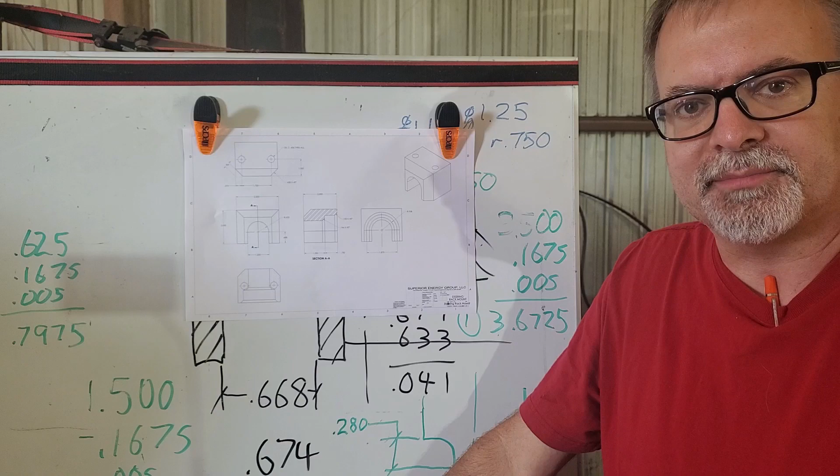We're rolling right into part 2 of making the hold down brackets for my son's power steering rack and pinion assembly in the Spitfire. So it's 2 rectangular chunks of steel. We roughed those out, hogged them out of a big block that I had. Now we get to put all the interesting features in it.

So basically, if you can tell from this view, we've got a scallop and then a clearance scallop behind it. And there's fairly good sized chamfers on the lead ends of both of those. And then around this small end, really big chamfers.

So I added a feature here. I took a measurement from the theoretical sharp corner down. I'll tell you about why I did that in a minute. 2 hold downs, 13/32nds, coming very close to the bore of this item here.

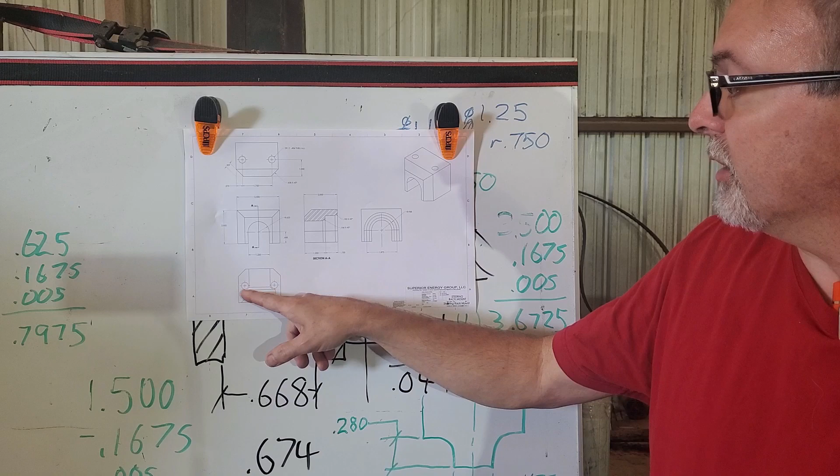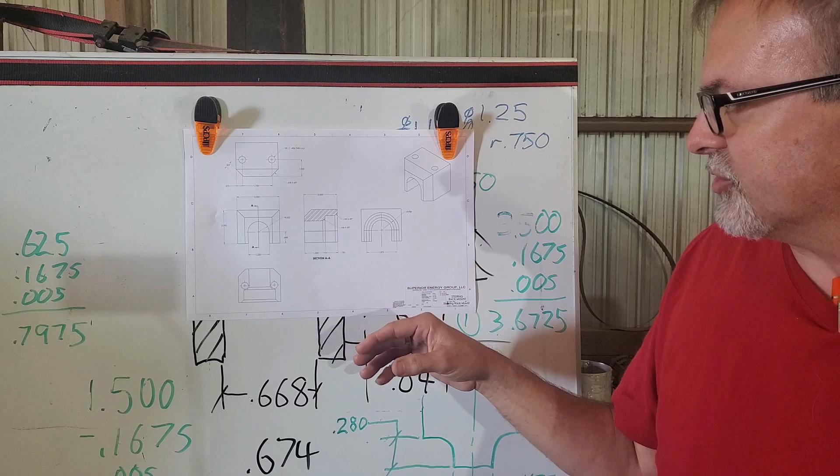Let's go over and take a look at the blocks and show you some opportunities. There's not many opportunities for combining operations or streamlining this process, making 2, but I've got a couple things we can do to make this a little quicker. So let's take a look at the blocks themselves.

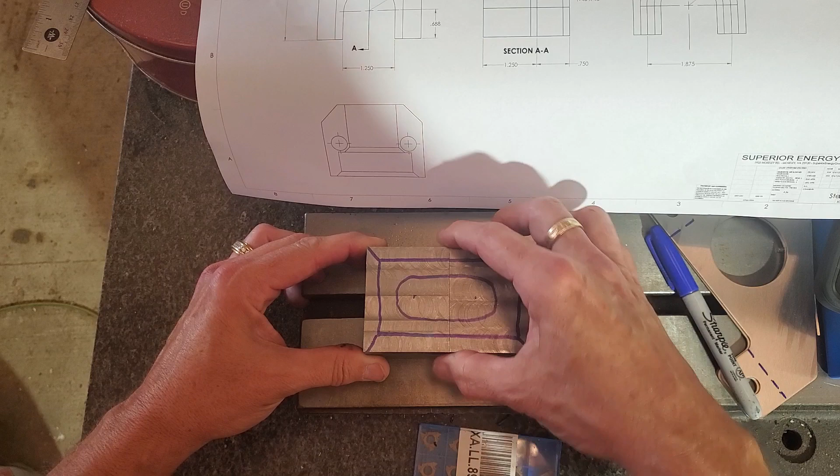I drew the features on the sides of this thing so I would kind of know what's going on. And my first thought for combining operations would be to put these together and machine it in one go instead of doing things individually.

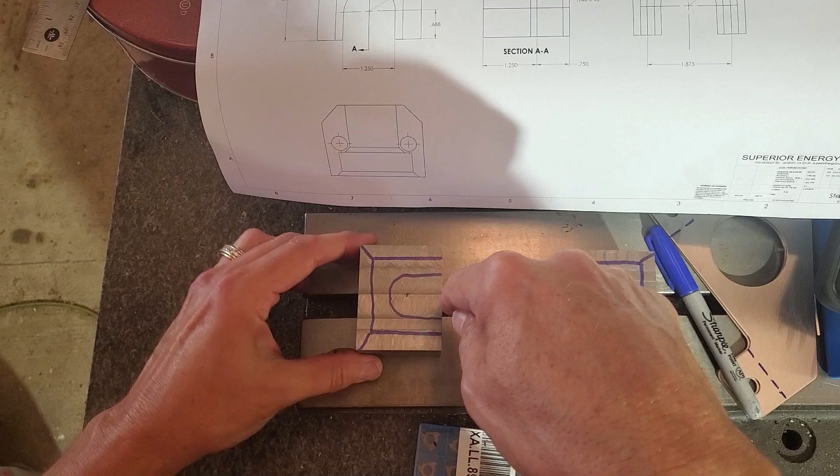Now, of course, if you didn't have a rotary head mill to do this feature, which has a scallop here, and then all of those internal chamfers, you would have to set up each block on a rotary table, and you would have to move your table into the cutter, swing it around, and come out, and do that for every pass until you were at your depth.

With the rotary head mill, I can clamp those together and I could offset my head and I can walk that profile and just keep increasing the depth until I'm at the depth I need. So initial thought, clamp them together.

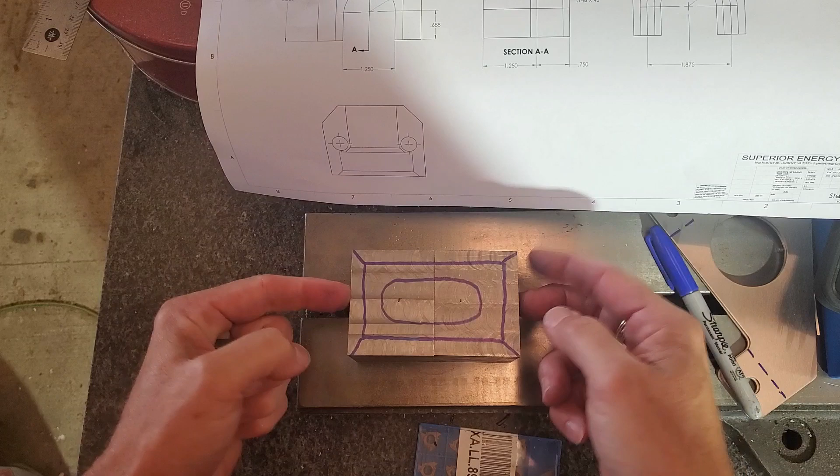Then I thought, well, you know what, if I separated them a known distance and I took a 1-inch gauge block and I separated these guys by, let's say, 1 inch, I would have an open cavity for chips to get evacuated and where I could plunge down and increase my depth.

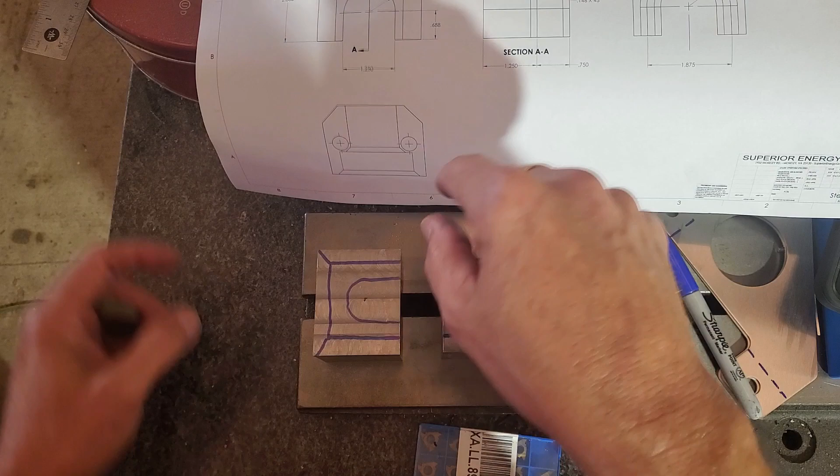This thing has to be 1.25 inches deep, minimum, on the small one. And so I will go just beyond that, and then when I flip the blocks over, same deal, have my 1-inch gauge block separating them.

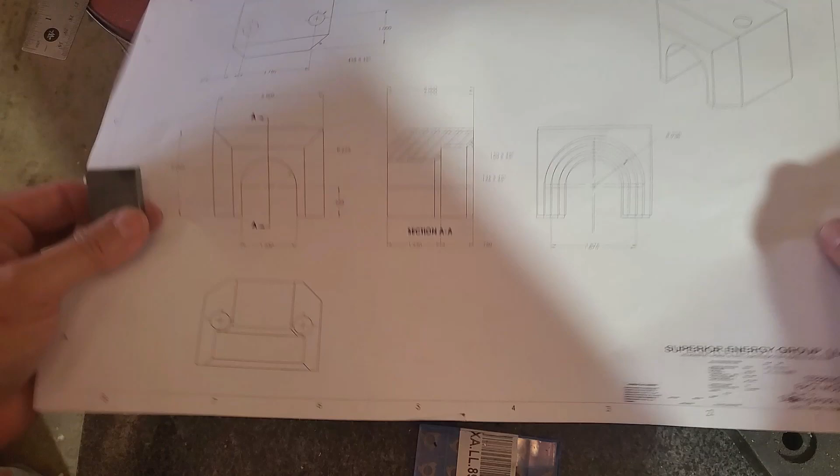I just have to plunge in and do the larger cut, which is - I don't have my - oh, there's a dimension, 1.875, and then a chamfer on each one. So I'll control my depth from that surface to that surface, which is 0.75 with the larger cut.

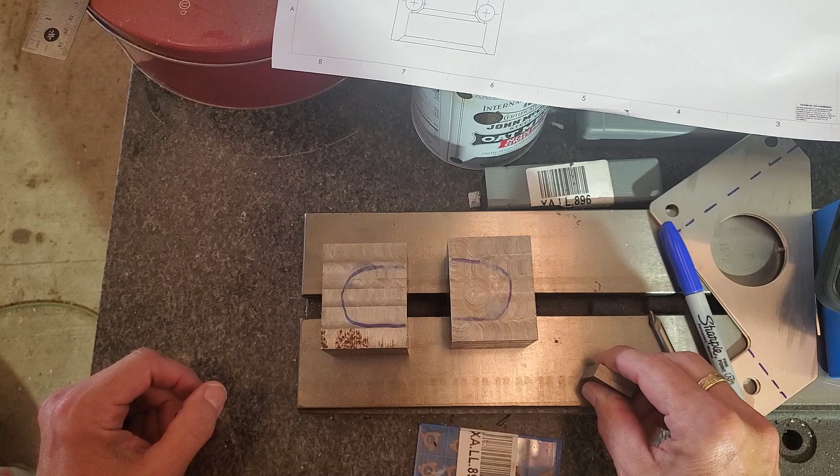So let's go get this thing set up in the mill, and let's crack on, as the brothers in the UK say it, with the rest of these operations.

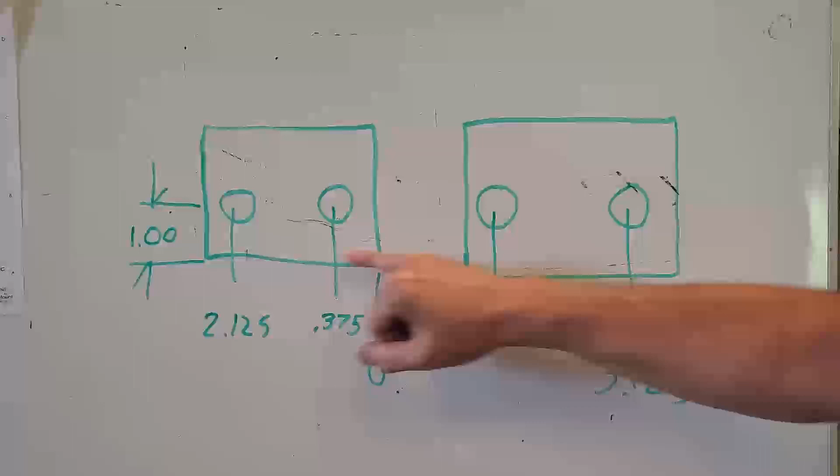My first setup, I'm actually going to clamp the blocks in the vise lengthwise. That way I can sit on my machined edge of the vise and the drill is free to poke down through between them. And I will zero up on the edge of one and the front face.

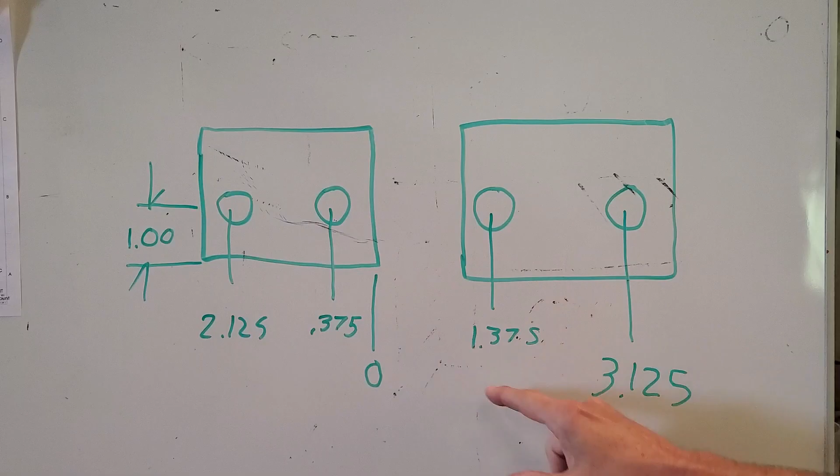So for my zero reference, my hole locations will be 0.375 and 2.125 in that direction. And in this direction, with the 1-inch gap, 1.375 and 3.125. These will be taken up to a 0.406.

Yeah, that just wants to start going in there.

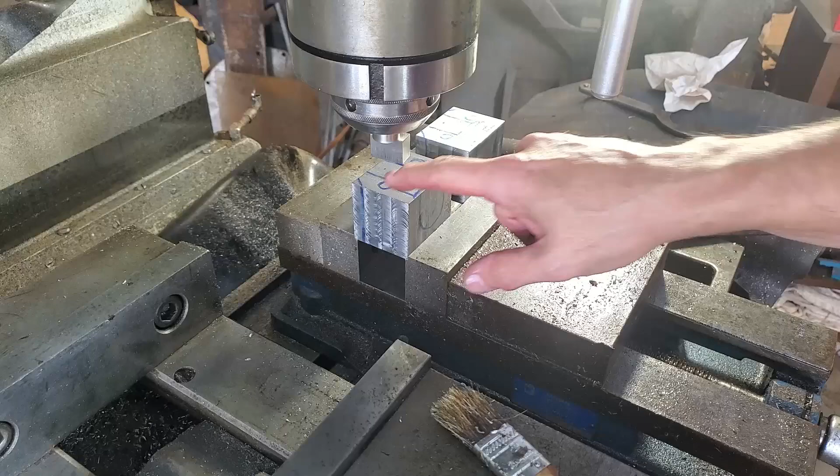Okay, so right now I've established that point as 0, 0. Minus 2.125, comma 1 is the location of the first hole. This is not the first time I've done this.

Try a little bit more aggressive feed. That was a thousandths feed. This is a 1.6 thousandths feed. Looks like we were better off where we were.

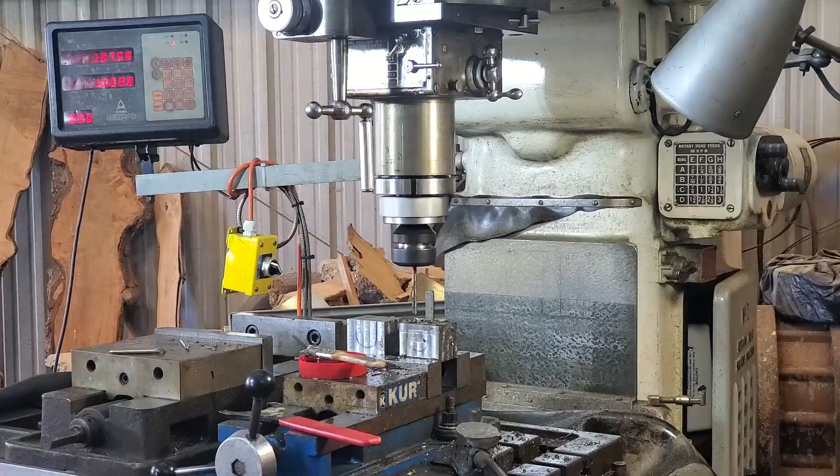Switching over to a China drill with a step shank and a hand grind. Actually drills pretty well. I can get it to focus.

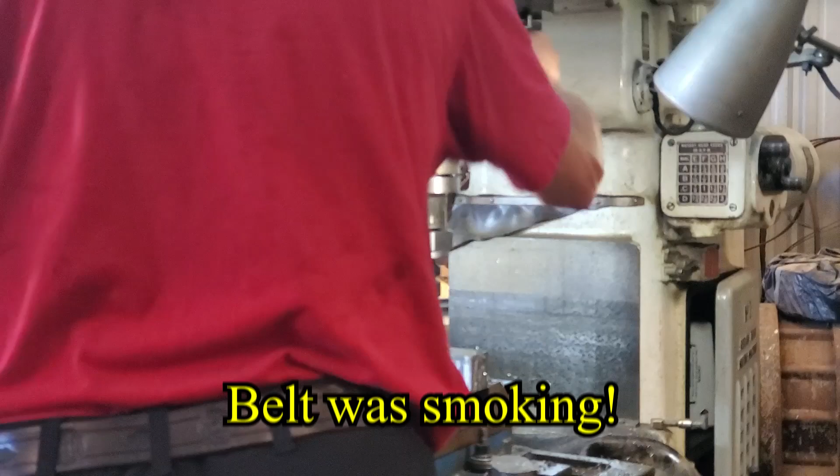According to FS Wizard, I'm supposed to be running about a 2.7 thousandths feed and 725 RPM. So I increased my feed to see how it performs. I let too many chips get packed in there.

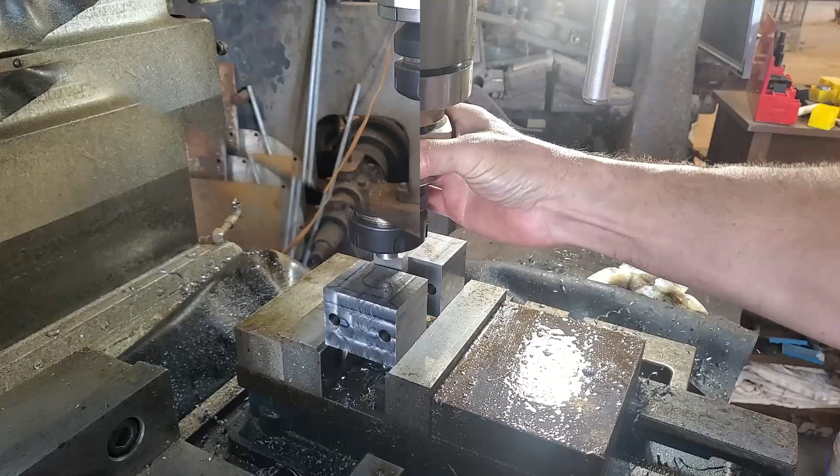Now going to re-zero my X. This time though, I'm going to make it halfway between the two blocks. So I'm going to take this dimension right here, snug against one block, and move a half inch and zero that.

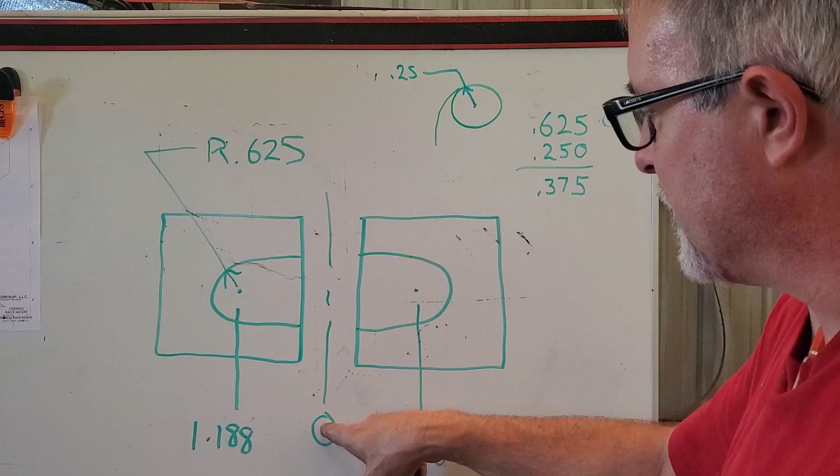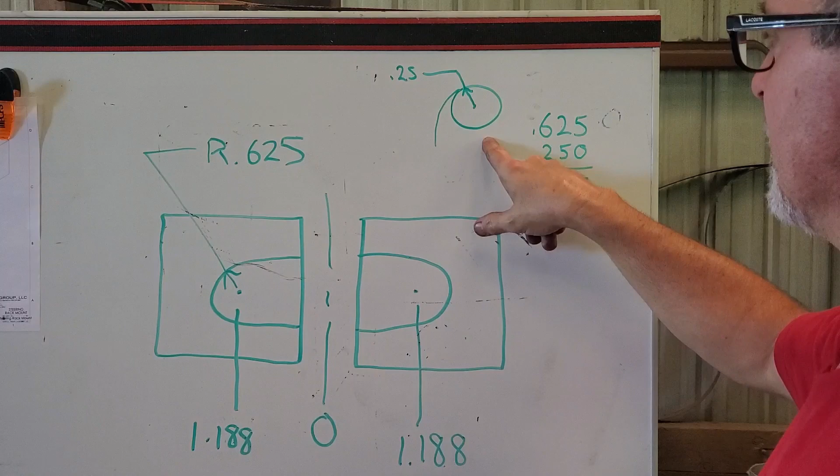Okay, I locked my Y table at 1.125. So here's how I'm set up for the next operation. I've got the 1 inch gap between here, I've got the machine at 0, I need to traverse 1.188 in either direction. At that point I swing the head around 180 and make a continuous loop. The cutter is a half inch, quarter inch radius, so to make a 5/8 radius scallop I need to subtract the radius of the cutter, and my head offset is 0.375.

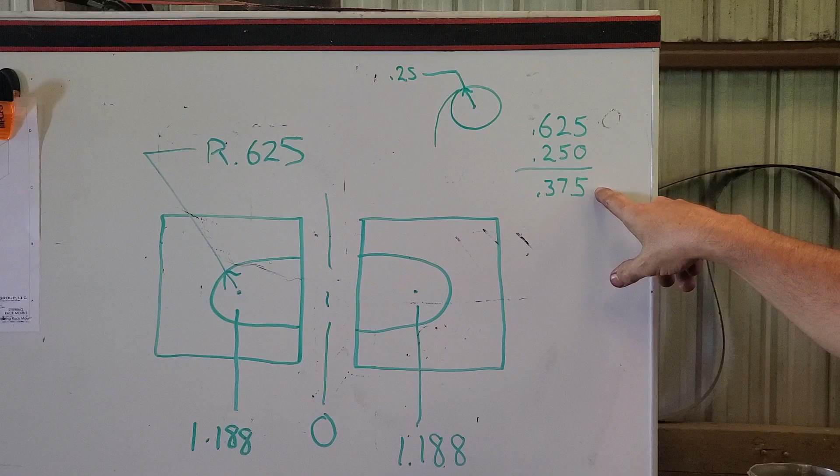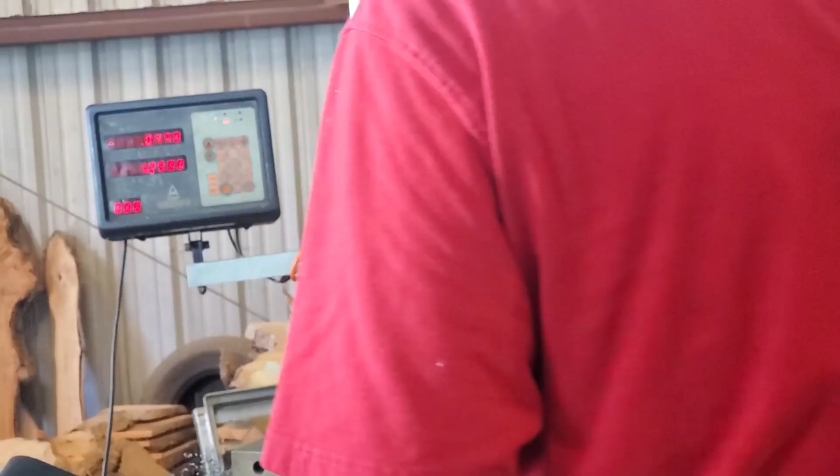I'm going to take a 30 thousandths depth of cut, just a witness cut to prove everything out. So offsetting my head, 100, 200, 300, 75. I want to lock that in. So there's my 180, and I'll be milling the front of this block first. There's my 30 thousandths. So I'm going to take it over to an X of 1.188.

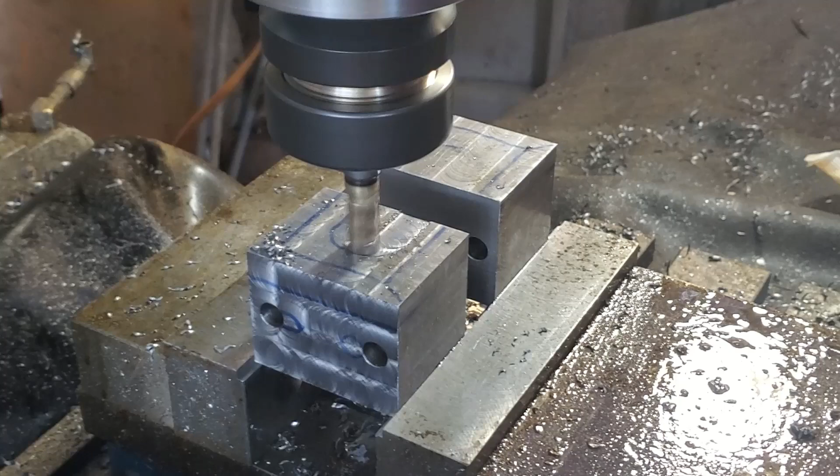Swing 180, I should be left with about an 1/8 inch wide rib standing up. And I just repeat that with a cut on the other side.

Now we just repeat that, except I think at this point I'm going to go with quarter inch depths of cut. Let's see how we can do.

Switched back over to my original collet because it just runs truer for heavy cuts. I think what I'll do is get the vacuum going, try to have 3 hands.

Let me show you what I've done here. I've set my kickouts, my table stops, so that the automatic travel will stop about a quarter inch shy of each end, and then I can hand dial up to the target on each side, but this way I won't accidentally overshoot it. So at each center I have to drop the cutter a quarter inch. I am currently a half inch deep. Next cut will be taking it down to 3/4.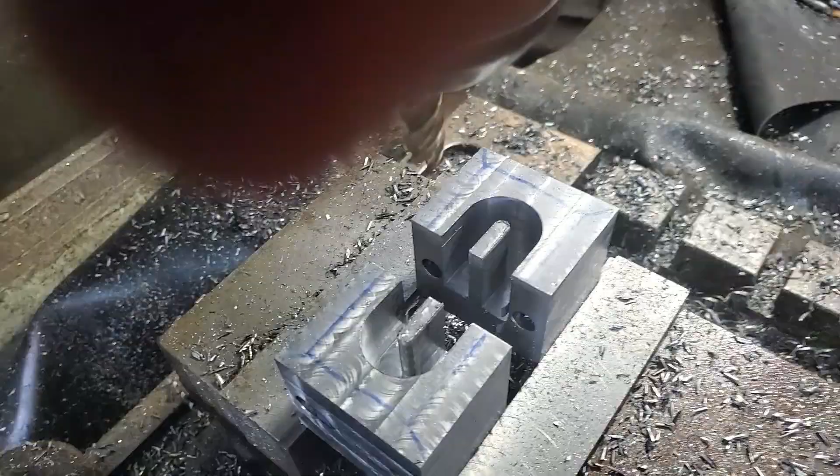That's really pretty cool. Do that on a manual machine, or without a rotary head mill.

I'm going to do one more operation before I break down this setup. It's not on the print, but I'm going to increase the offset of the head. Got my 45-degree chamfering tool. I'm going to put just a tiny little chamfer, 30 thousandths chamfer on that outer edge. I'll just bring the cutter down until it touches. And now I'll come down another 30.

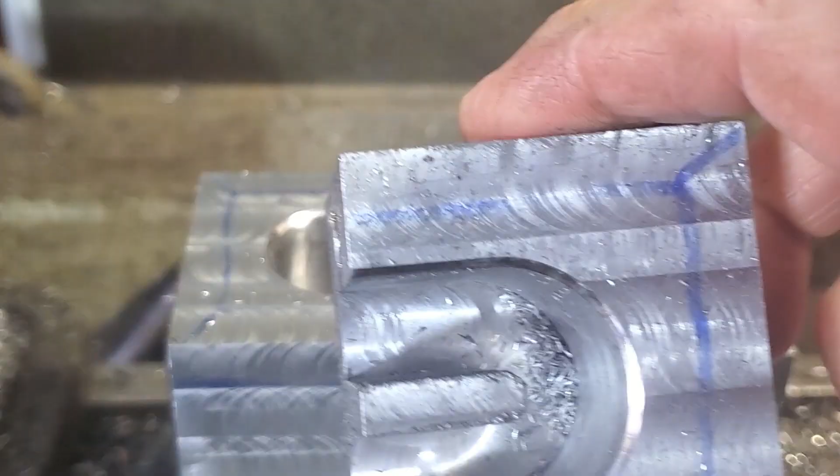Manual feeding. A deep cut.

Now, my theory is, got my DRO set for an X offset of a quarter inch, which means the half inch cutter, when I'm touching this block, puts that face in the same place it was when I was machining the other side. This establishes my spacing, and if I simply lock this down, I should be exactly on top of my other profile that I just made.

So this next profile has the same coordinates, it's just a different offset. Okay, so I have my offset, 0.6875 times 2 plus a half inch cutter diameter is 1.875. Same deal, walk it in, swing around, and a 30 thousandths deep test cut.

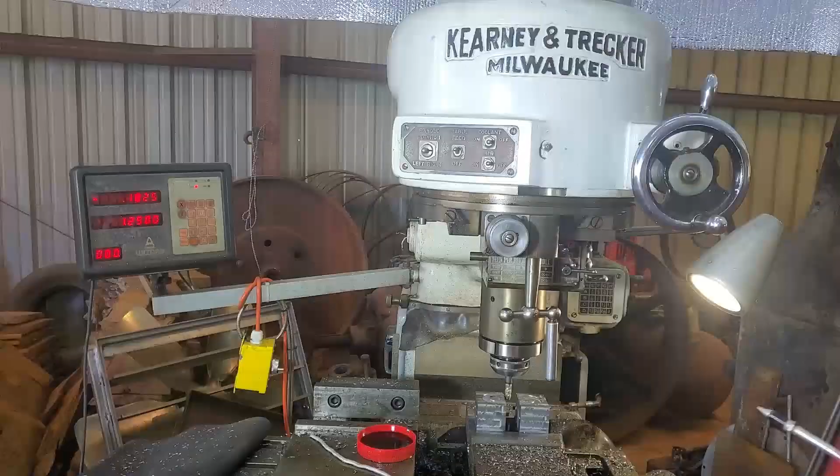There's my first pass, quarter inch deep. This side is exactly 3/4, so it's 3 passes. Final cut, an additional quarter inch, bringing the total to 750. This should break through to the other cut.

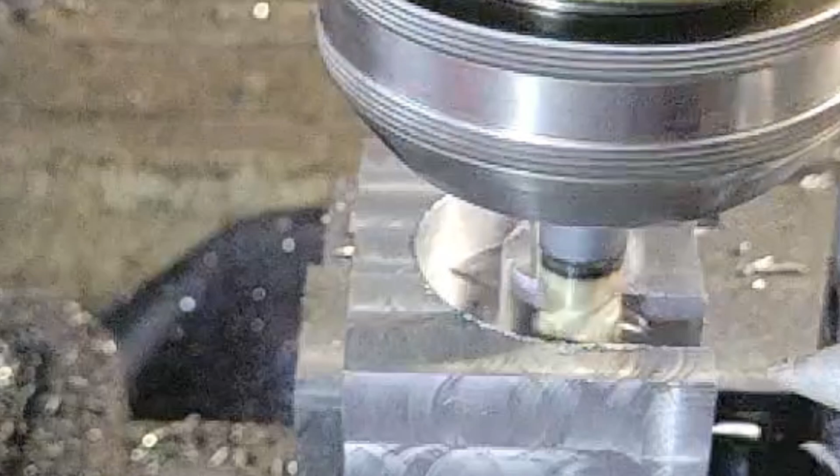I know this is going to look a little sketchy, but it's a better alternative to that chunk falling down in the path of the cutter, which happened on the other side. So I'm just going to put a little bit of tension on this, keep it away from the side that's cutting.

The last internal feature is a 150 thousandths chamfer on that edge and that edge. I'm going to do the top one first. I cleaned up a bit here and here so I can see exactly when I'm making contact.

Let's do maybe 100 thousandths on the first pass, and well, maybe we'll do 3 passes of 50. That'll just be a little easier.

So first we'll establish when I make contact. So we have contact at 80 thousandths on the dial. 10, 20, 30, 40, 50. We're going to use the same coordinates, I just increased the offset of the head.

Walk 3 circles around this orbit, this elliptical orbit.

Alright, so what happened here is it stopped cutting into the arc and I thought something moved. But I was at the wrong coordinates, that should be 1.188. So as I was going into the arc, now we should hear a consistent cut all the way around. There we go.

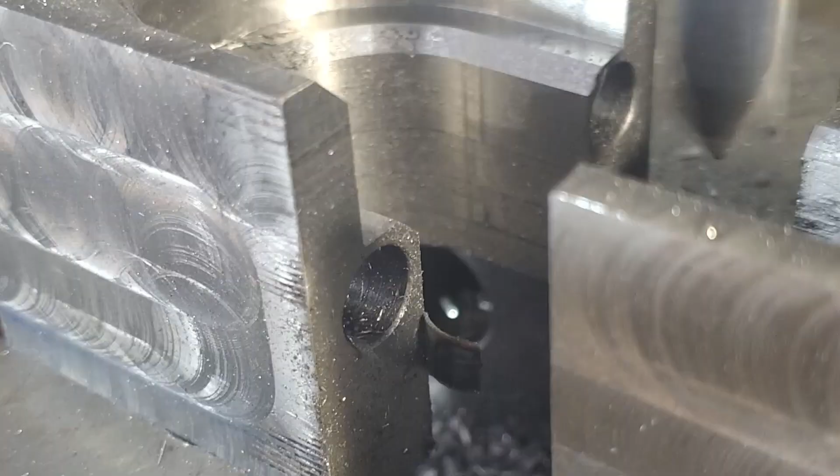Last cut's going to bring us awfully close to the holes here, but that's what it looks like on the print.

Final pass is a 10,000th cleanup cut, and we have the room for it.

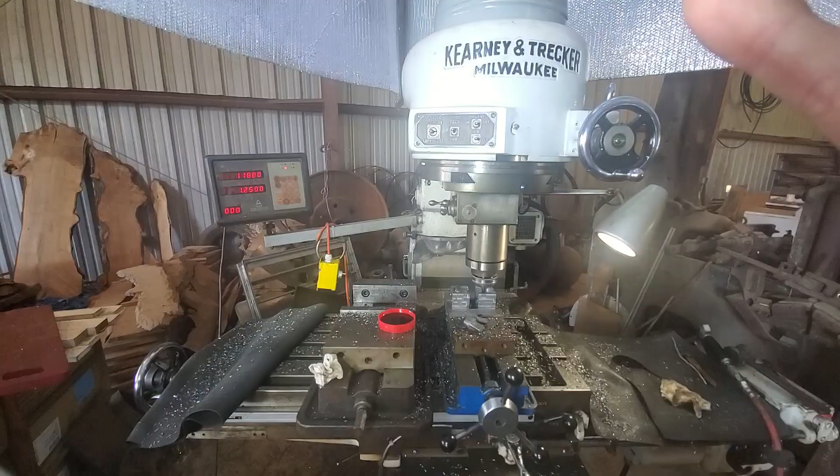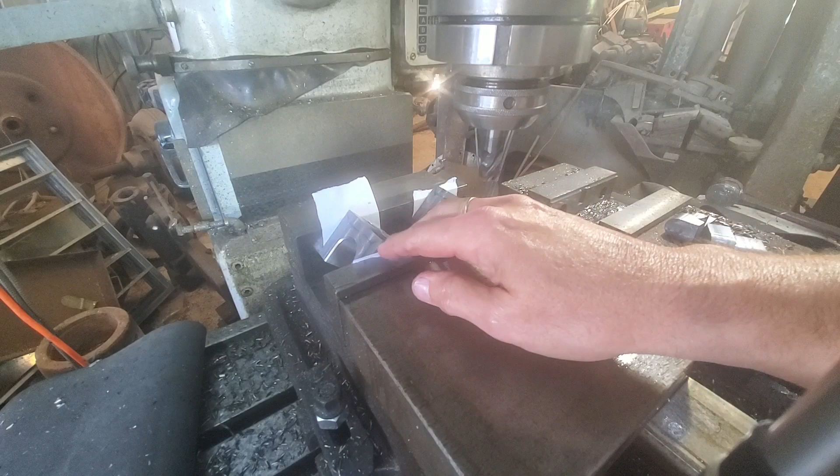Final operation, I switched over to the big vise just so I can get more grip, and I added paper in here, which is supposed to help because I do not have a tilting table. It's on the list, but I have never been able to find one decent one at a decent price.

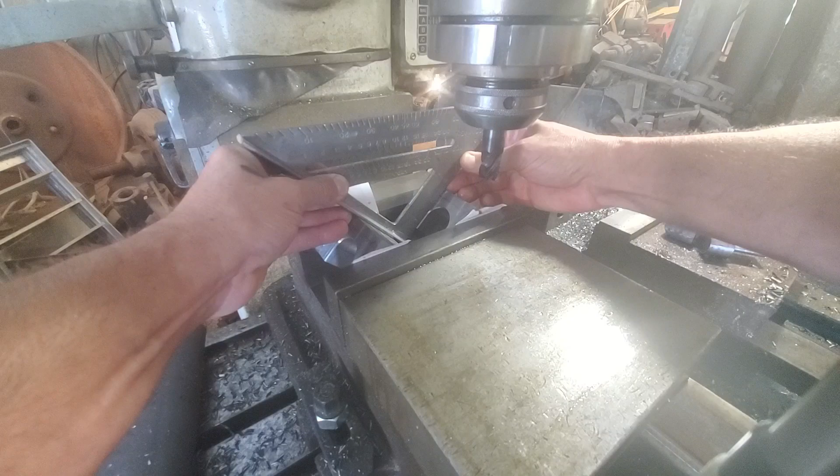So these chamfers on these three edges, they're all just clearance, nothing critical about the angle. So I set the first block up with just a speed square, and the angle between them with the speed square because I could not get the speed square in with my other vise. So these two top edges will be done first, and the dimension is 0.309 from the peak, from the point of contact.

So let's get a little closer here. I've got my cutter and the quills zeroed. I'm going to bring it down so I make contact. I think I am just touching.

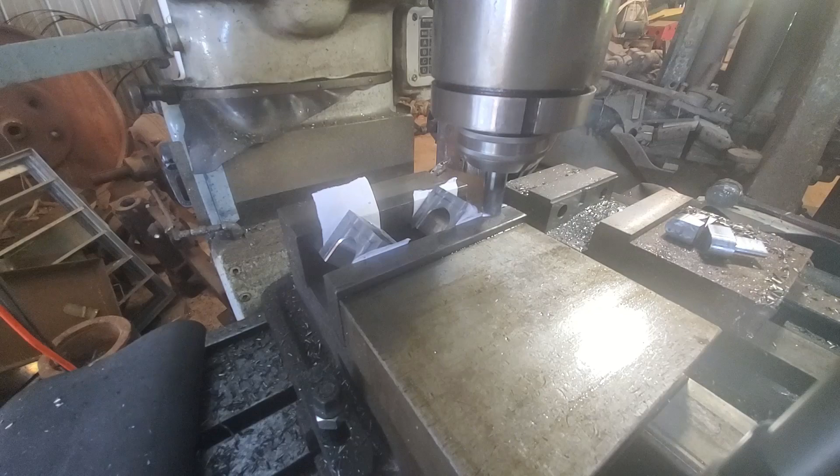So let's come down 309, 100, 200, 300, 9 thousandths. I think I'll do these in maybe 2 passes. I'll just be cranking the y-axis here.

Let's be smart and push the burr into the part on the next one.

Now, because the blocks aren't square, I do have to reset the height.

Theoretically, my height should be the same here, but I'm going to find it again by raising the knee. I think I'm just kissing the surface.

You can see they look a little bit wonky, the amount of material left exposed here and here. Here's why: that one lifted up as I was adjusting it. So the chamfer is bigger than it was intended to be.

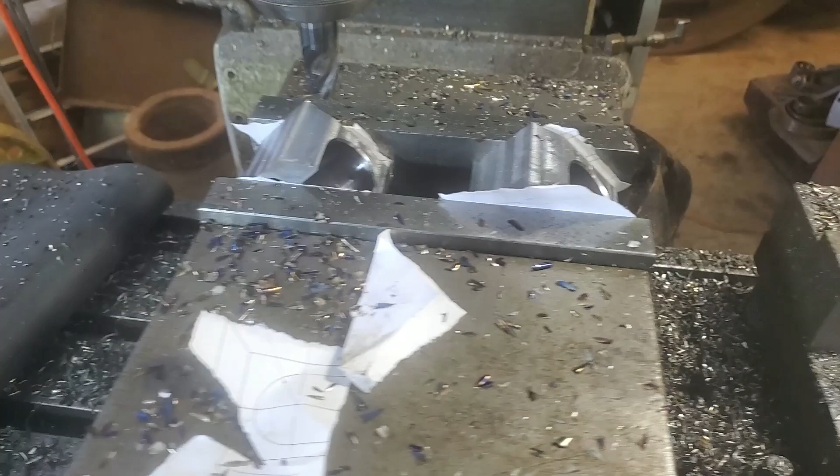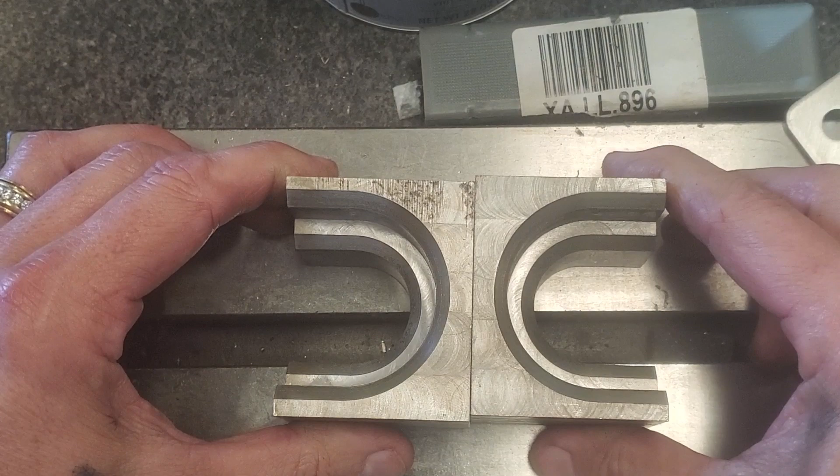Good thing it's just clearance. Well, there we have it: 2 hold down clamps for the Spitfire power steering mechanism, the rack and pinion.

A bit disappointing to screw up the part visually on the very last cut. One of those deals where when the vendor calls you and says, hey, we did this, can you still accept them? You know, as an engineer, I typically say, yeah, if it doesn't affect the function of the part, go ahead and ship it. But you tuck your tail between your legs and learn from the mistake and try not to do it again.

These are all just clearance for something, so these are going to be clamping that rack down. It's just a stamped steel housing, and these chamfers here are all clearance, so he'll be happy to get them, and he'll be able to move on with his assembly of the components on the frame. So I hope you enjoyed that.

There was a lot of heavy cuts, heavy hogging on these to get them to size, and having the rotary head feature certainly did make this quicker than what it would take on a conventional Bridgeport, milling all these radii that just blended right into straight sections. So it was a lot of fun.